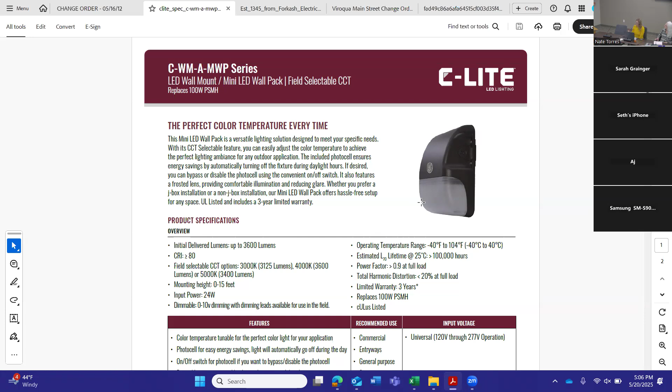Essentially it's got a sensor on it. It will turn on during nighttime and off during daylight hours, although you can disable it and just have it on-off. One of the things I liked about this was that you can select the temperature of the light, which is often something that gets brought up. It's intended to light the ground and out to the fence area. We want not just a cut-off light intentionally, because we're trying to make sure it's lit well enough that people don't feel like they're disguised while they're up there.

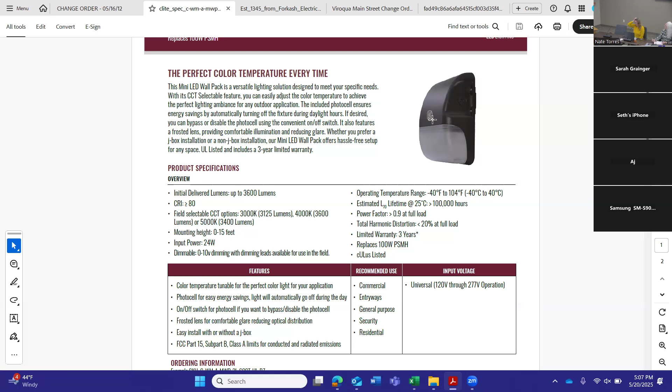So this is what we're looking at. I think it's a good choice, an outdoor light. And as mentioned, it truly is a security measure.

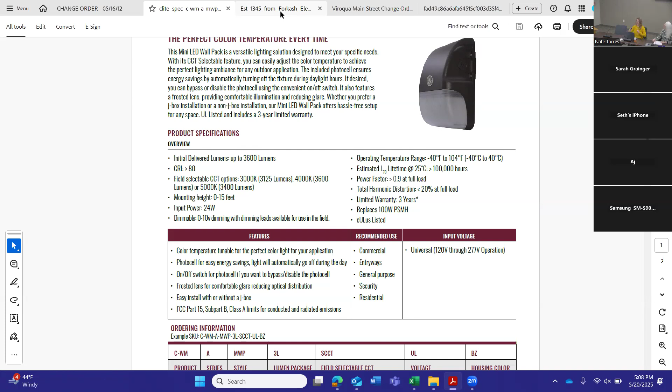Did it say it had a 3-year warranty? Yes, that was what it said. And are they attached at the top shining down or at the bottom going up? It'll be up on the actual pedestal ring. He talks about it being fastened with magnets, really powerful magnets, which is good because we don't want to penetrate the pedestal, since it causes weakness in the tower structure.

There is a hole that is already there that was used for the camera for the park once upon a time, so we can use that. But we don't want to do anything else to the steel. Thank you. Any other discussion, questions? Okay, looking for a motion to approve or not.

This is Crystal, and I would move approval of Forkash Electric proposal for installation of lights at the base of the water towers. I believe the total's $4,900. Todd will second it. Motion by Crystal, second by Todd, to approve the installation of the lights at the water towers. Any further discussion? Roll call. Seth, aye. Todd, aye. Andrew...

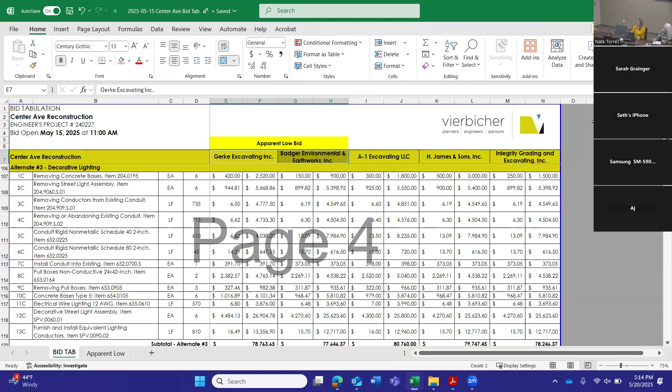Let's see, approval of bids for Center Avenue reconstruction. So we ended up having 5 bidders for the Center Avenue project.

We had a range of bids, it was one of those situations where, well, at least I was going, wow. Here is the base bid results, and I'll give you a different visual later, but this is just the bid tabs. Gerke Excavating was the low apparent bidder based on the base bid, which was $2,747,498.02. You can see where everybody else falls in, but Badger Environmental is not far off for a $2 million plus, $2.7 million project, 30,000 or less off is a tight spread. That's always good because it means we're really getting a good number and it's competitive.

But then we had a couple of alternates. Alternate 1 was doing storm sewer, basically from Court Street to Jefferson, and it extended particularly to get storm sewer at that Jefferson and Center Avenue intersection by the post office. They have some interesting storm sewer with water coming off of the building and going through the sidewalk.

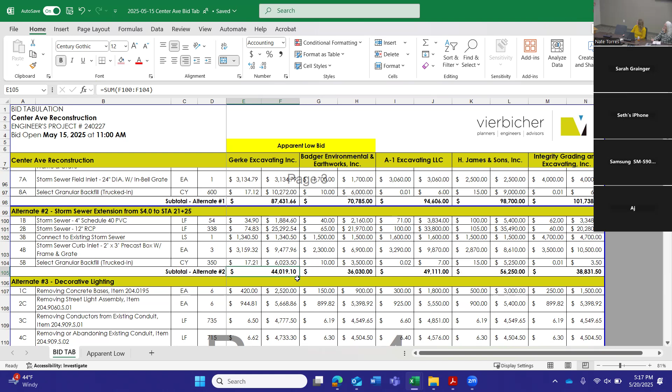So again, if you look, Gerke was at 44,019.10 and Badger was at 36,030.

And then the last bid alternate was the decorative lights. We put the whole decorative lights package in one. So again, we have bid alternate totals at 78,763.65 and 77,646.37. This was really close, was the gist of it.

This was the 4 lights we talked about. Remember, I think we actually ended up having 6. They ended up with 6 because these are concrete base type 5 -- that's how they ended up with the design.

We had KL Engineering come out and do an assessment of the lighting scheme, where the current overhead lights were, and how we might go about lighting. Long story short, what ended up happening was they gave us a snippet of different options, but there are actually more combinations than this.

Essentially, the storm sewer work without the lighting -- which we're going to put in no matter what, I'd suggest -- basically made or switched it one way or another.

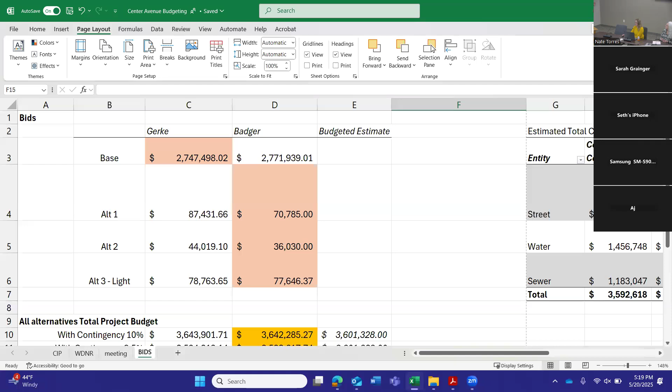Okay, so I'm going to switch out of this one and go to hopefully a little bit cleaner spreadsheet. Hide this. Okay, so this is what we just saw.

If you look at them individually, Gerke got the base bid, but on every alternate, Badger was the low bidder. So now we obviously need to decide what to do.

My desire is to have all of them in, because that's why we had them in the bid -- if they were a good price and we could afford it, we should do it. I'd say the lighting was technically an alternate, but I don't think we ever really intended it to be one; it was just the versatility of how to put it in the bid, because they were authorized to do the work as the bids were going out, so they were kind of scrambling.

This number won't add up here, because it also includes the engineering and the contingency. If you add up all the alternates and the base bid, using a 10% contingency -- which is usually what we use at the design stage of the project -- you can see the bids are all just slightly over what we had as our original budget.

At this point, typically you can go down to 5% contingency once you get the bids, but we're debating whether we want to go that low. I feel like we put the project together pretty quickly, so I like to have some wiggle room.

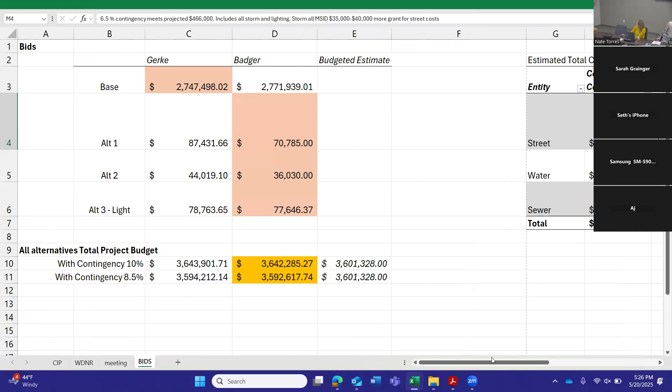So I wanted to show like 6.5% would be where we would be at that budgeted amount.

And it may go higher or lower. Water would get, our total water costs.

So that's all the water main plus a third of the street costs. And it would end up with a grant of roughly $230,000.

So then it incurs that 1,226,000. And again, we're assuming contingency here. So we will end up having with the loan some type of unfunded amount in the 40,000 to 35,000 range for water, if it's going to assume all of its cost of a third of the street. I'd say that would either be the borrowing we're doing or having it under reserves. That's an amount that would be very manageable with our water reserves.

I found it helpful when you went through it with me — that column J where it says incurred cost, that's specifically loan cost, right? Right, this is the cost that the utility or general fund or whomever would pay. Not necessarily — it would be a loan in one way or another. For the street department, it's going to be a general obligation loan. For the water and sewer department, it's going to be that. But I think it's important — when you say it's unfunded, it doesn't mean we won't pay for it. It just means it won't be covered by a loan, because the water and sewer loans won't pay for that portion, for reasons we won't get into now. So we have to pay for it from a different pot.

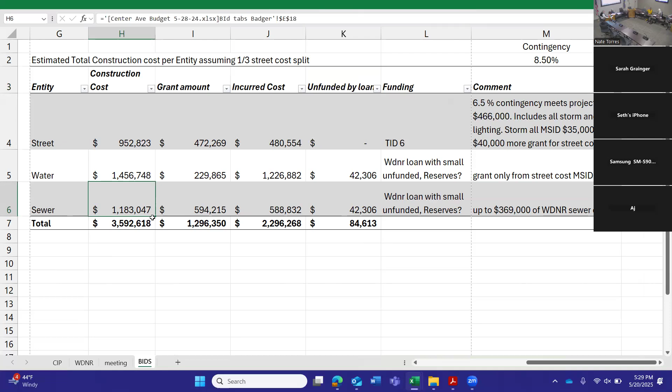These words are really challenging because it's different — it depends on how you look at it.

For sewer, it's a similar situation — about 1,183,000. The grant amount is even more for that, closer to 600,000, because roughly up to 369,000 is coming from the DNR and can only be used for sewer — we have no choice. In that case, we would have this loan amount, and again we'd end up not being able to realize it all with the DNR loans. We'd have to fund it some other way through reserves or borrowing. I expect it could be something we fund through reserves.

All in all, we have a $3.6 million project. We're getting about 1.3 million in grant funds. The rest is coming mostly from low interest loans from the DNR. There will be this amount coming from TID 6, and then we'd have to decide how to go about these additional amounts. As the project goes on and we get rid of contingency, some of those numbers will probably shrink, but I don't want to predict where that will land since we're not even starting construction yet. But overall, things are looking good — we'll end up being able to fund more than we originally planned, and take care of it in terms of general fund cost.

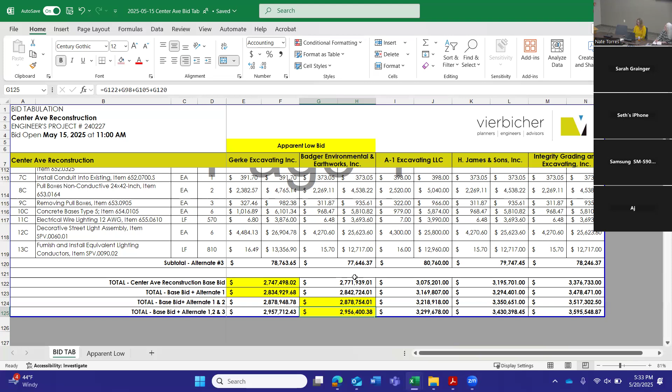Okay, anybody have any further questions, discussion? AJ, Seth, I know it's hard if you can't see what we're looking at, probably. It all sounds like Sarah's done a lot of work to make things fit where we need them to fit. Glad to see that the bids are competitive, so we know they're on the right track.

I would agree. Anytime we can get those alternates in, especially that stormwater, plus if it lowers that cost a little bit elsewhere, that's a good thing to have. So great job, Sarah, thank you.

So we're all in agreement we should go for the alternates. Somebody might want to make a motion? Okay, I'll give this a whirl. This is Crystal, and I would move approval of the bids for Center Avenue reconstruction to Badger with all of the alternatives. And I believe the amount is $2,956,400.38. Todd, I'll second it.

Okay, motion by Crystal, second by Todd to pass on to Council Badger with all the alternates. Roll call please. Andrew, yes. Crystal, aye. Cindy, aye. Seth, aye. And Todd, aye. Okay, motion carries. Very good, Sarah, that was a lot of figuring.

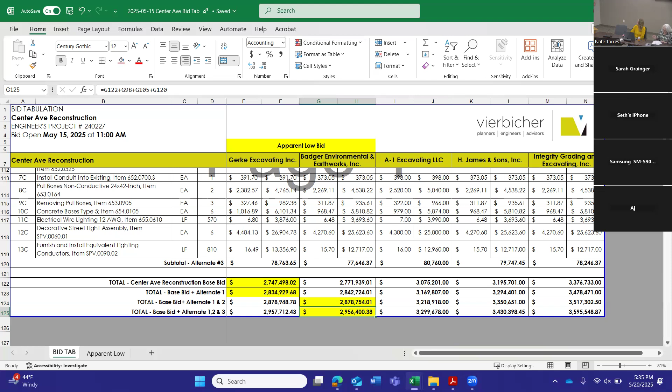Okay, and then you get to talk about Center Avenue some more. Oh, are we at the updates? Center Avenue project update. Okay, do you want to show the agenda, Nate? Sure.

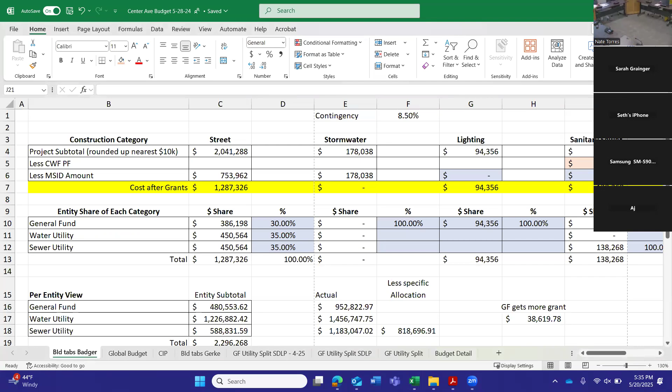Well, this is kind of - I've got standing updates with all of the projects. So obviously we went out for bids. The bids came in looking good. We had 5 bidders, which is great. We don't often have 5 bidders.

Now that once next week's meeting's over, we're gonna meet our requirements for the DNR because they needed us to have signed bids by May 31st. So we'll work on that. They're okay with, Lori, don't panic, about getting everything signed and all that stuff together for us. If it doesn't happen right on that date, they just know that we've accepted the bid.

And then, assuming it's Badger, which is what the proposal is, we'll work with them to set a date for a public meeting. Because we wanted to wait so that we knew what their plan was, so that we didn't have a vague public information meeting. And then we'll have to go through anything that would be of question.

We're really not changing the road too much. There is that multi-use path on the west side of Center, but it doesn't change anybody's property line or driveway area. That's really it, it's pretty straightforward. I think the biggest thing that I've heard from talking to people is more construction.

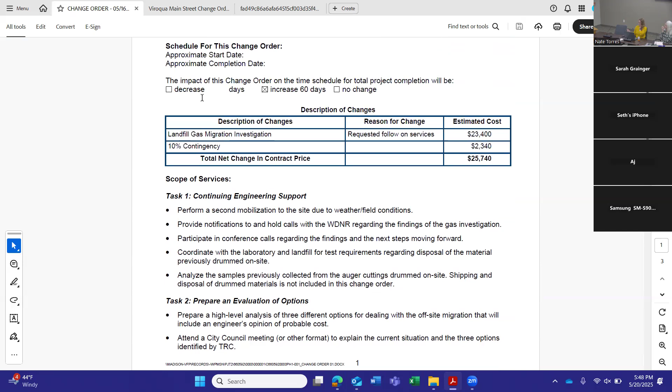And also we have a good plan for how we're moving forward with that. So that's what this proposal is for. And I'll work through some of this also, but just so that we can go through the proposal first.

So when they were out, they had done their work on a time and materials basis, was what their estimate was. And they ended up getting rained out and having a second mobilization. I did talk to them about whether or not that was something they could add to this, but they said that if they had a not-to-exceed limit, they would have put in some contingency for things like that, but they were trying to keep this as bare bones as they could. And so they have added that into here.

Then preparing an evaluation of options, so how would we deal with this, giving us some options to contemplate. I would say that we have a pretty good idea of which way we would like to go so that we can keep moving things forward quickly, because obviously our timelines are tight. But they're still going to walk through like what other things could we do.

So our main contact is Mike Amstadt. He has been doing an excellent job. He's currently on vacation fishing, but I talked to him today, and he has agreed that they will do their best to get something to us for Tuesday's council meeting.

So that we could move forward, because one of the things is we don't necessarily need to go through the full regular bidding process because of our timelines being so short. We're working in tandem with a local contractor that has the qualifications.

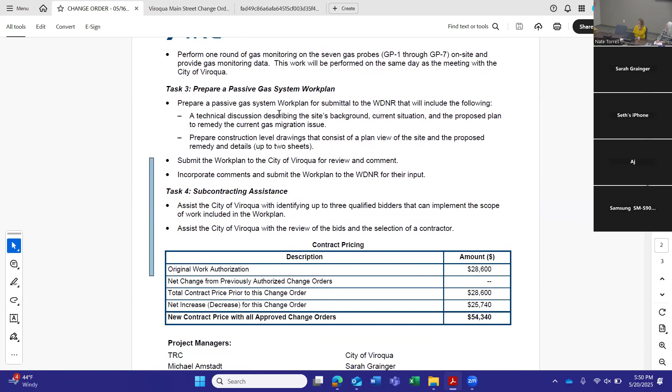And then preparing the work plan, like we said, that is something the DNR is asking us to do. So describing what the situation is and the proposed plan, and then they would have drawings for what they would like to have done out there.

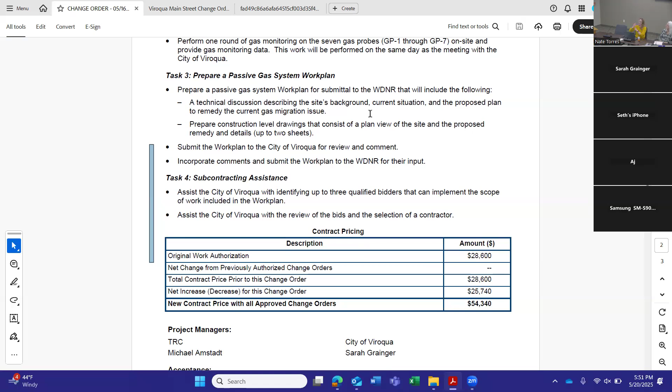And then we would look at it, and the DNR would look at it, and once everybody's in agreement we would move forward. The DNR has been really good about just saying check in with me, if we're good with it you just keep moving forward, not our standard construction permitting process like we have for our water system, where we're hoping to get an answer in 60 days. So they're involved in the process as we're going.

This last task, when I talked to Mike today, he said this task was about 34... 3,400 was to do this kind of bidding work, and we are not going to be doing a formal bid. We just don't have time for that. So we'll get bids, but we won't do a letting where we have bids to review and things like that.

We will end up - do you have questions on that? Not necessarily. Okay, do you? No, I was just, I felt like there was - I'm just trying to follow along.

So what you're saying is that we will get multiple bids, but there won't be the traditional competitive bidding process. We could get multiple bids. I mean, right now we're trying to work quickly.

And there's not very many contractors in this area that have that qualification. So we have a contractor who's working next to the project right now, and it just makes sense that if their bids come in reasonable, their mobilization is pretty much zero and they can be there right away. We certainly could look for more, but I would anticipate them not being competitive.

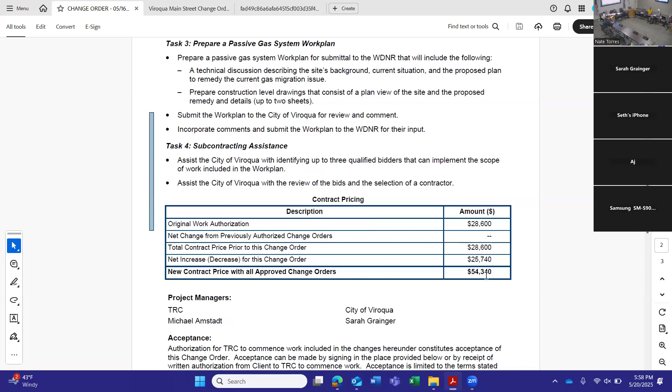Do we need a dollar amount? Do you have one here? The amount was 54,340. Yep, 54,340, and that's the amendment. So you've already authorized 28,600? Yes, this has already been spent, change order. So 25,740 is the increase. Sorry, Crystal, thank you. I second that.

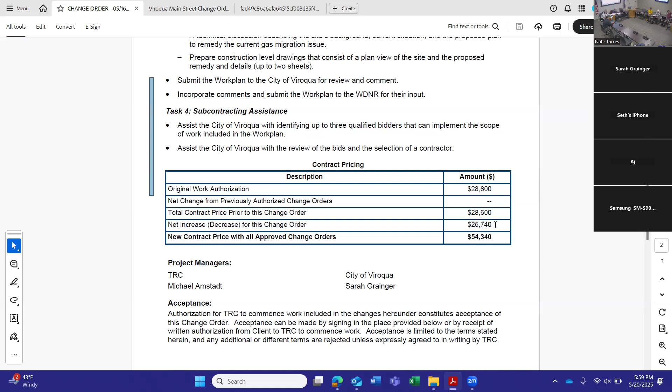Okay, looking for a roll call, please. Crystal, aye. Cindy, aye. Seth, aye. Todd, aye. Andrew, aye. Motion carries. Excellent, another big project you had to look through.

Okay, sewer project update. We've got 5 minutes. Sewer, street, and utility have more, but I'll do it in 5 minutes for all three. I don't think the next meeting's till... oh, we do? 6:30. Well, never mind, we just learned our lesson. We can't meet the deadlines anyway. Disregard. I sometimes self-impose them so we don't take so long, but this one they didn't even ask.

Okay, so let's see, what were we on? Sewer projects, moving right along, actually. I'm failing to update my to-do list for tomorrow.

So the lift station is now out. No more lift station at the fairgrounds. And the last part of what they have to do in terms of putting pipe in is where that hole is in the concrete in the road. They're going north up to Kroll Ready Mix's driveway with new sewer. And then everything is in place.

So then it's just restoration. I believe he said that next Monday they're going to put the concrete in for the road so they can open it back up. They're working underneath, so Monday it won't be open because they'll pour it on Monday, but then they have to cure it, so it'll probably be another week after that before it's open.

And currently the work going north is underneath the sidewalk there, so they'll be replacing the sidewalk for the Wild West Days, which has been planned for a long time. We've had hazardous sidewalks identified all the way up there, but we thought, why put it in when we're going to take it out right away?